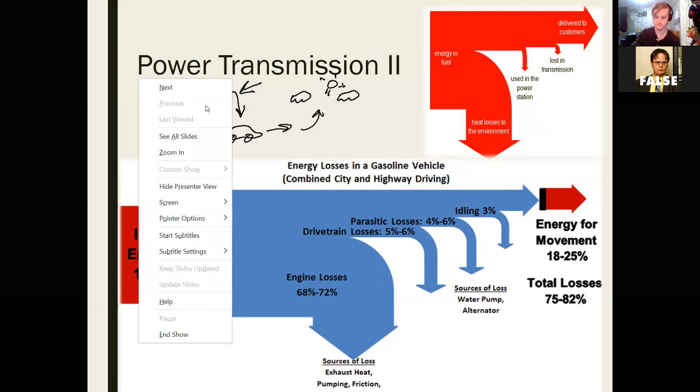And sometimes there's a bigger picture than just electric cars are cool, although Musk would like us to think so. And I'm not against electric cars. I like electric cars, but you have to make sure that where the power is coming from is actually a good place. If it's solar, if it's geothermal, if it's hydro, those are great. Wind power as well. But if they're just running a power station and then pumping it into your car, well, ripperoni.

All right, that was just an interesting thing. It doesn't have really anything to do with the class other than we're talking about power transmissions.

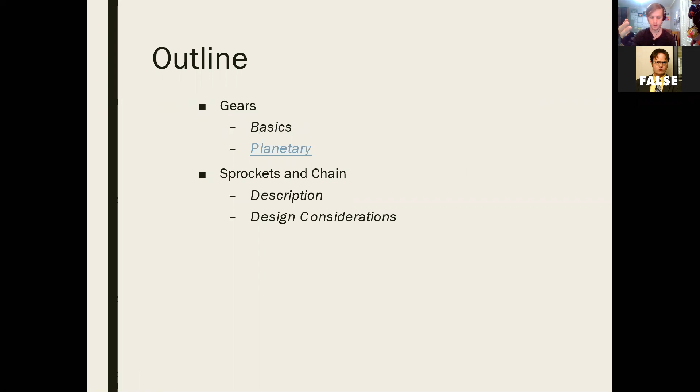So first off, this is just what we're talking about today, and we talked about it a little bit last time, is gears. You've got your basic gear types, and then you've got planetary transmissions. You guys have probably heard of planetary gearboxes. And then we're going to talk a little bit about sprockets and chains a bit more. So this is stuff we talked about last time. Do you guys remember this?

Okay. Like I said, I recycled some of these slides, so there's a bunch of these. Is that all good? I think that's good. Okay. All right. So things with gears.

You're not going to need to know this a lot, but this is some of the gear math stuff that I was talking about. So diametral pitch. It's basically how many teeth are there. Oh, I can just draw on this. That's cool. How many teeth are there per diameter, kind of, which you can see: number of teeth of the gear over pitch diameter. So it's basically how big is the gear and how densely packed are the teeth.

So do you have a bunch of little teeth, or not very many big teeth, right? So it's always an integer number. You can't have half a tooth. That doesn't make any sense. And they're always divisible by 4, at least standardly. So 32, 28, 24, 20, those all work. And diametral pitch is P, okay?

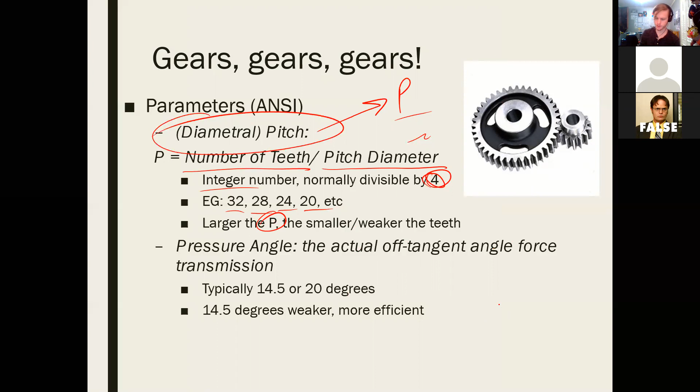Capital P. So the larger the diametral pitch, the smaller and weaker the teeth. So basically, if your diametral pitch gets bigger, you're going to have smaller, more densely packed teeth, but they're more likely to break because they're smaller and not as beefy. The reason that's important is if we were to do a free body diagram on a gear, right? Let's see, this is our gear and here's a tooth, and we can pretend there's more teeth, but all we care about is one tooth, okay?

If we were to draw the free body diagram, if there was another gear interacting with it, it would be causing a force on that gear this way, right? And we could basically do statics, which is what we did in the first section of this class, to find out if this gear tooth would break. So lots of gears will come with ratings as to what their breaking stress is. It's called their shear stress. Shear just means to the side.

And basically, if the forces that you're putting on that gear tooth are more than it can take, your gears are going to break, or they're going to grind, or they're going to shear, those all mean the same thing. But it is important that if you have something quite heavy, you check to make sure your gears are going to be able to handle it. And it's just a rule of thumb that if you know it's going to break, you need to try to make the diametral pitch smaller. So fewer teeth, bigger teeth.

Pressure angle, it kind of matters. The main reason it matters is because it's one of the things that causes two gears to mesh. If they have different pressure angles, they won't mesh. If they have the same pressure angle, they will mesh.

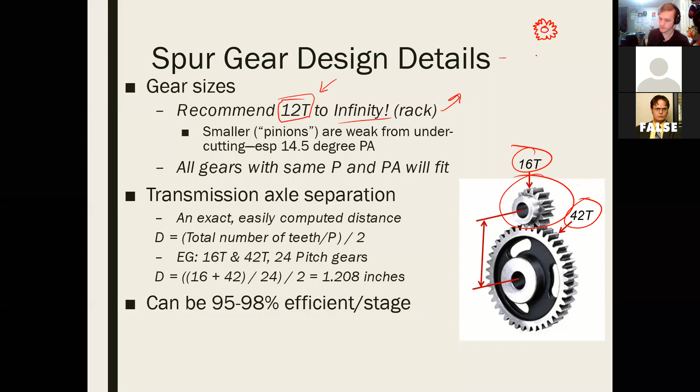Do you guys know what a pinion gear is? So rack and pinions. The pinion is the spur gear, and the rack is like a flattened out gear almost. Pinions can be smaller, and sometimes they're even smaller than 12 tooth, though it's rare. I think I've seen some in FTC. Go ahead. Is it like a gear with like a tread kind of thing? So a rack and pinion, if you imagine, this is a gear, and the rack is like this. Oh, yeah. And these two mesh with each other so that when this rotates, this moves in a linear fashion.

Okay. So sometimes the pinion, which is this little spur gear, can be smaller. They're usually pretty weak because they're tiny. And if they have the smaller pitch or pressure angle, they can break pretty easily. So you have to be careful with them. And this is important: if they have the same diametral pitch and the same pressure angle, they will fit, they'll mesh. So this is the diametral pitch. Oops, well, there we go. And pressure angle.

I don't actually know what pressure angle is. What is that? Yeah, so that was on the last slide. Okay. Basically, down here, oh, sorry, two slides back. Boink. Oh, gotta love these transitions. There we go.

So diametral pitch is just your number of teeth divided by your pitch diameter. The pitch diameter is, I don't know if you saw that, Jude. If you have a gear, you've got the under part of the tooth and the outer part of the tooth. The pitch diameter is in between them, okay? Yeah, I know. And it's typically the true diameter of a gear. Yeah. So that's how you find diametral pitch, which is P.

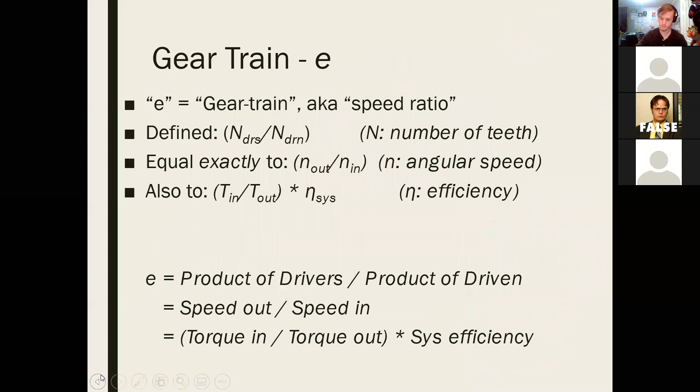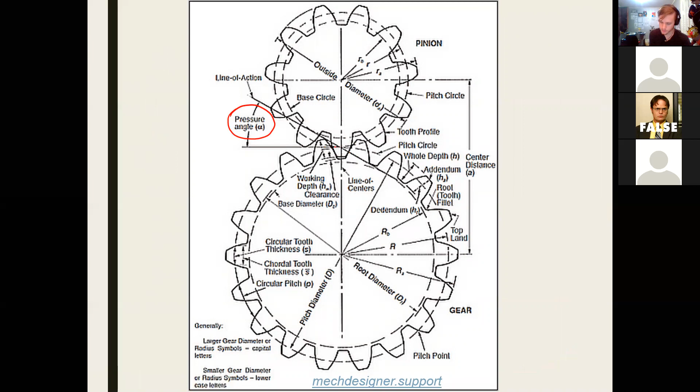Pressure angle, there's typically only two. It's either 14.5 or 20. Pressure angle is basically the angle of the tooth. And we can go back and look at pressure angle itself so you can see. Oh, there we go. So pressure angle is right here. And basically, let's see if I can get this.

There we go. Yes. There's a few different places that you can find it. I don't know if they have it on here, and it's no.

But basically what it is, if you take a point from the diametral pitch, or the pitch diameter, the pitch circle on one tooth, and then draw a line through the next tooth where it's perpendicular to that tooth, there's the pressure angle. Gears will always say their pressure angle. It's either going to be 14.5 or it's going to be 20 degrees. It's one of those two.

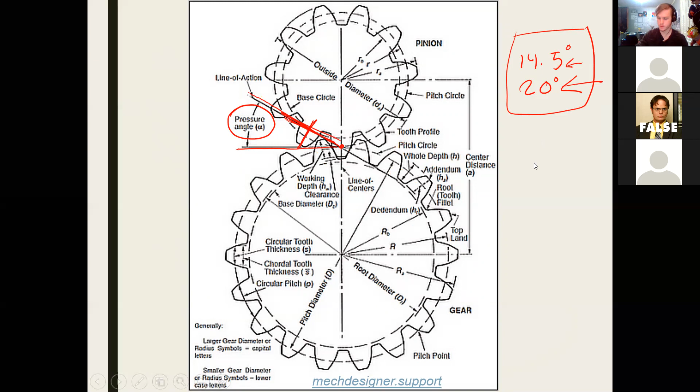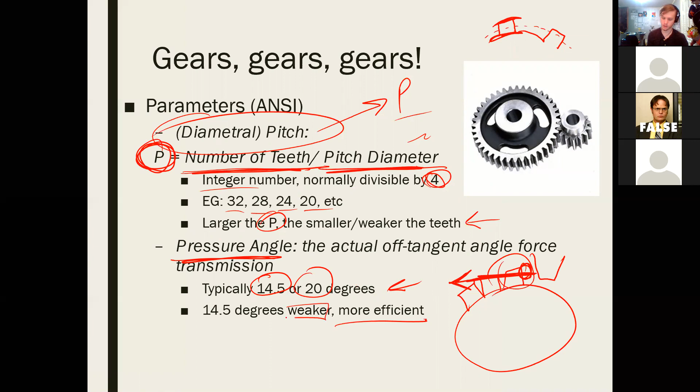I think 20 is typically more standard. 14.5 is weaker. I would imagine that most of the gears are 20. 20 is just kind of what I put whenever I design gears. So yeah, you can see down here, it's typically one of those two. This is true though, it is more efficient. So if you're doing a low load application, 14.5 can be better. But it depends on what you're doing.

Oh, this is actually important real quick, and I forgot to mention it right here. When you're looking for basically the axle separation of 2 gears, and you can see that over here, marked by D, it's pretty easy to get. D, which is the distance between those 2 axles, is going to be your total number of teeth divided by P, which is your diametral pitch, divided by 2, okay?

So if we have a 16 tooth gear and a 42 tooth gear, it's going to be 16 plus 42 divided by 24, which is the diametral pitch of these gears, divided by 2. And that can tell you exactly how far your axles need to be from each other for these gears to mesh perfectly, okay? Which in FTC, that's a little harder to do just because sometimes you're using the Actobotics rails and stuff. But if you're making your own siding, your own panels, this is a good thing to know because it's a way for you to mathematically check that your gears are going to mesh well, okay?

So keep this in mind whenever you're designing transmissions because it's a good way to double check. Kyler taught us how to do that in his class. You can also use CAD just to do it for you, but if you want to check it mathematically, that's a way to do it.

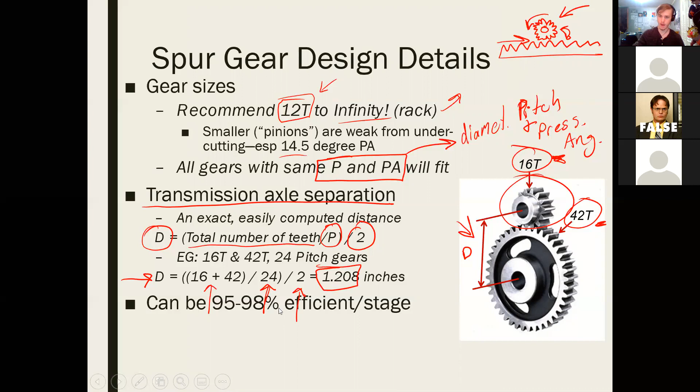Okay, worm gears. These are some different types, a little weirder gears. Good things about worm gears, and some of you probably know this, this is the big one: they're anti-backdrive. They won't backdrive. If the worm gear is the driver and the spur gear is the driven, your system won't backdrive. It'll always go one way unless you power it the other way. Okay.

So their helix angles, they're a little different than the way the spur gears work. We will say that a spur gear has 50 teeth because it has 50 teeth on it. A worm gear is defined not by teeth really, but by helixes. They're usually called leads. This one has 4 leads. Basically, if I took a circle with 4 sticks on it, and then I just twisted that circle around, you can kind of see that the number of leads is how many starting points there are on that worm gear.

So if there were only 3 to start off with, then it would be a 3 lead worm, and they'll twist around each other in a helix pattern, kind of like that. It's hard to draw. You get the idea.

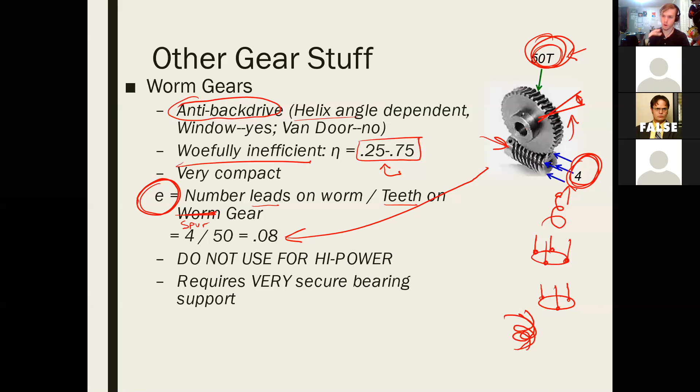For worm gears, real quick, the gear ratio, E, is the number of leads on the worm divided by the teeth on the spur gear. So for this diagram, we've got 50 teeth on our spur and 4 leads on our worm, so our gear ratio E is 4 divided by 50, which is 0.08. That's useful if you want to know your torque to speed ratio. If you need a high power application, don't use it. And make sure it's really locked in and mounted well if you're going to use it.

Hey, David. Since I'm not officially in FTC and haven't had to deal with a lot of this stuff, I have no idea what any of this means, so I'm basically just listening. So basically, this thing here at the bottom. Well, yeah, I've seen worm gears.

So technically, this typo is not a typo. Technically, the spur gear here is the worm gear, and the little thing down here is called the worm. But for simplicity's sake, I call the worm a worm gear and the thing connecting to it a spur gear. But basically, Carson, if you want something for high power applications, so high torque, high speed, worm gears are not the way to go.

If you want something relatively low power, either low torque or low speed, usually low speed, and you don't want it to backdrive, like you're winding up a winch to make something climb, and you don't want it to go back when you turn off the motor, you don't want the weight to pull it back out, then a worm gear can stop that. It's anti-backdrive, so it won't undo what you did unless you turn the motor on in the opposite direction.

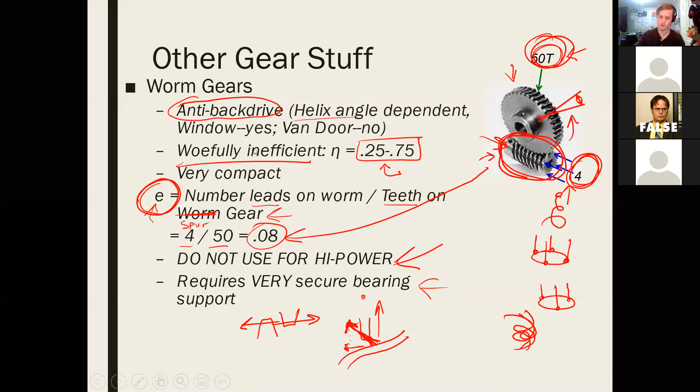of the two components of that force, the one going in the direction of actual movement is going to be much smaller than it would have been at a 90-degree angle, because some of this angular force is going up into the gear and not doing anything. Does that make sense? Yeah. So that's why worm gears are pretty inefficient; the statics just don't work well for them. This is just to show you how worms and screws in general work. Basically, you've got your lead and your pitch.

This shows different types. So you can see single start, double, and triple. You can see this one only has one lead start. This one has two lead starts. And this one, you can't really see the third, but there's one here, two there, and there's a third kind of in the back. Oh, you can see them up here. There's 1, 2, and 3.

I think most of the ones for FTC only have one lead start. I would imagine so. But when you're doing the gear ratio for it, you do need to know the number of leads. Yeah, like this is like the tooth number, right? Oh, yeah. So it's basically over number of teeth. So your gear ratio, E, is your number of leads divided by the number of teeth. And the teeth is the spur gear that it's connected to, right? So you do need to know your number of leads if you want to find your gear ratio.

The pitch is how angled out are the leads. So you can see this one has a pretty shallow pitch. This one's got a much more angled pitch, and then this pitch is pretty far over. Basically, it's the angle of the lead coming out. So this would be a shallow pitch, this would be a not so shallow pitch, and this would be a steep pitch. And that's basically just the lead going around, right?

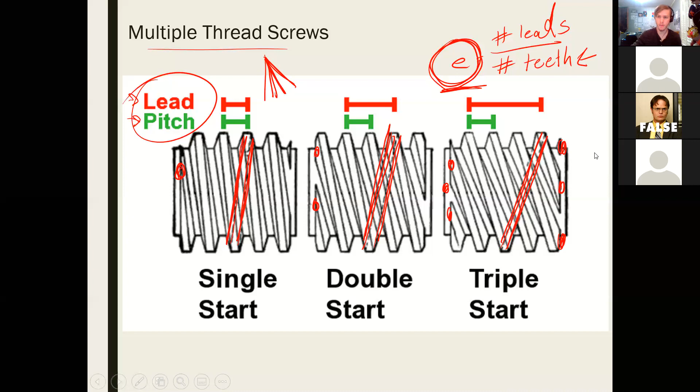This is something that I mentioned earlier, planetary gears. We're not going to go into them too much, but you guys have seen them. Your motors use them. The gearboxes on your motors. So say you have like your AndyMark 30-to-1, right? It's probably got a planetary in it.

And planetary gearboxes basically just invert one of the gears. That becomes the ring of the planetary gearbox. And then you've got your planet gears, which are these outside ones. You got your sun gear, which is this middle one. And it's basically an easy way to have an efficient system with a good reduction. So basically, they're used in motors a lot. You probably won't use them in your own applications so much.

A nice thing about them is that, let's say this outside is going this way. We got to draw some boys. Basically, they all spin in the same direction, right? So this one would roll this way, this one would roll this way, this one would roll this way, and meshing would all work out.

Not a huge deal. They're in your motors. I just wanted you to see them. There is some cool math to do with them. If you want to, you can look them up. They're more efficient just because you have 3 points of contact instead of 1, and everything's locked in a little bit more.

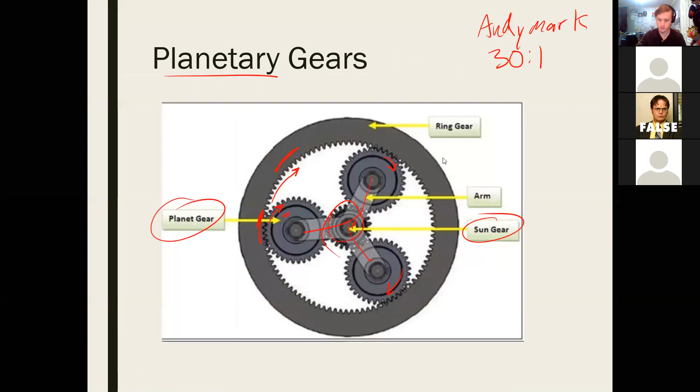Let's go. Oh, that's the wrong thing. There we go. Anyways, to do the gear ratio for them, and you guys probably won't do this, but since they're in your motors, it might be useful, is the number of teeth on the sun, which is the middle gear, divided by the number of teeth on the sun plus the number of teeth on the ring. Okay, so those middle gears don't really matter other than they connect the two.

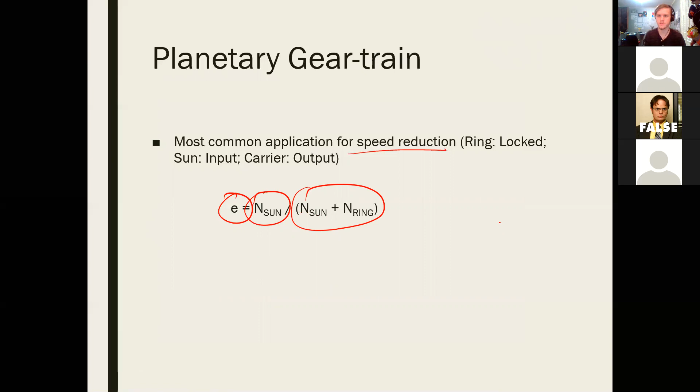Okay, and I think that's pretty self-explanatory. I don't think I need to draw that. Does that make sense? Cool. Works basically the same as the others. All right. Chains and sprockets are a little different.

So ANSI is standard stuff. It is like the standard, whatever you want to call it. It's the standardization. Chain number. Whenever you look at a chain, it's got its number. The first one is going to be its pitch in 1/8 inches. The second digit is going to be basically what kind of chain it is. So is it roller chain, lightweight, or bushed. Those just mean different things about the chain. They're not super important. Roller chain: these middle segments roll.

Lightweight means it's lighter and cheap. It could break more easily. And bushed means they're kind of like reinforced. They have bushings in them. An example, yeah, so this one, basically number 25 here. So you might see like a number 25 or a number 35 chain, right? Basically that means it's a 1/4 inch, it has no rollers, and it's bushed.

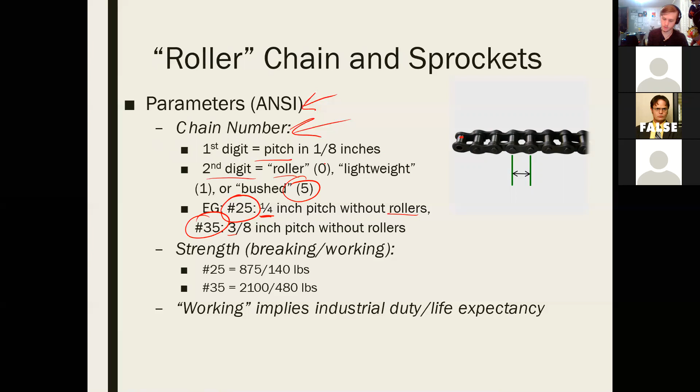Okay, so that's just kind of the way chains are labeled. I'm not a huge fan of it, but you know, I'm not the one who decides. I feel like that's pretty self-explanatory. A number 35 chain is 3/8, so it's just 3 times 1/8. You get what the pitch is, and your pitch is this guy. And it doesn't have rollers because it's got a 5, so it's bushed as well.

Important boys down here. I don't know if you'll ever need this for FTC. It is useful in FRC, which is strength, the working strength of the chain. There's working strength and there's breaking strength. Those are different, and they're importantly different. Basically, every chain number has a breaking and working strength. So if it's a number 25 chain, it'll show you that its breaking strength is 875 and its working strength is 140.

Basically what that means is 140 pounds is what you should run it at. However, technically you could run it past that, all the way up to 875, but if you do that, it's gonna break at 875. You almost never get near the breaking strength, because if you do and you hit a bump and it just tugs the chain a little bit, that impulse force will snap your chain. The higher the first number in the chain, the higher these numbers are going to be because you're dealing with a thicker chain.

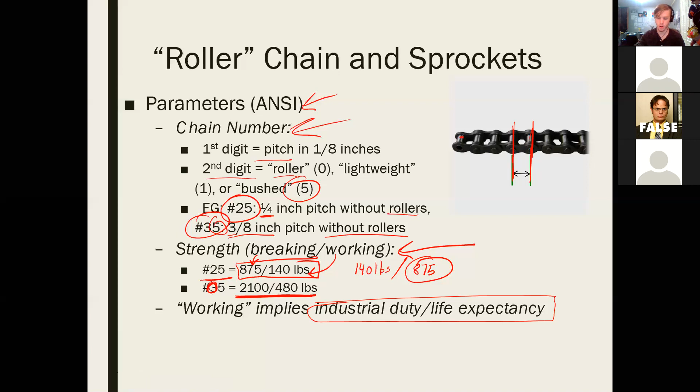There we go. I think most of you guys know this, but basically chains work in a couple ways. There's master links, which are these guys, and there's half links, which are these guys.

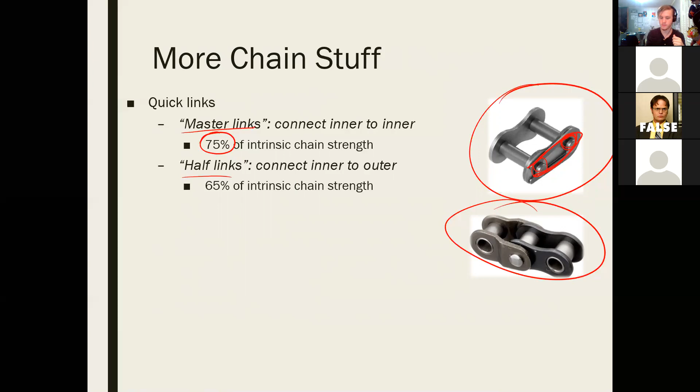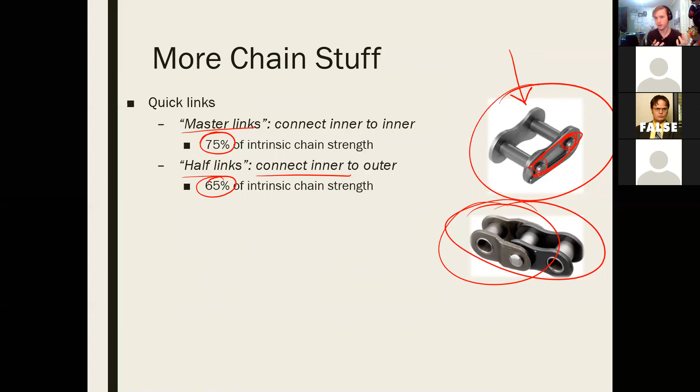So yeah. Half links, they connect inner to outer, which is over here. So if you ever need to connect an inner piece of a chain to an outer piece of a chain, you'd use a half link. There are reasons you need to do that. You won't see them mostly in FTC. You'll probably see master links in FTC if you're using chain. They're 65%. So again, you reduce it to 65% if you were using one to know that your chain's not going to break.

So quick things for chain design details. Sprocket sizes, similarly to gears, have standards. Gears are basically 12 tooth and up. However, sprockets, you're usually not recommended to go higher than 75 tooth. Why that is, if your sprocket gets bigger with more teeth, your chain in relation to the sprocket is smaller, and it's more likely going to break for your application. You're putting more force on it because it's a larger diameter.

So 75 is kind of the top that is recommended, just because that keeps your chain ratio to your sprocket size pretty good in terms of not breaking your chain. The smaller it is, the more vibration you're going to have. That's sort of sensical. You got this big diameter, it's going to wobble. And if things do vibrate, there's going to be more wear and tear on them, as you would assume. If you have larger leads, you're going to have chain loss. That's not a big problem.

And ratios should usually be kept less than 7-to-1. Reason for that is the forces in the chain, basically. It has to do with, you can see here, the chain angle. If I had a tiny little guy right here, that chain angle would be really steep, and the force on the middle of the chain would be higher and is more likely to break. Basically, just don't stress your chains. So keep it less than 7-to-1. Keep it between 12 and 75.

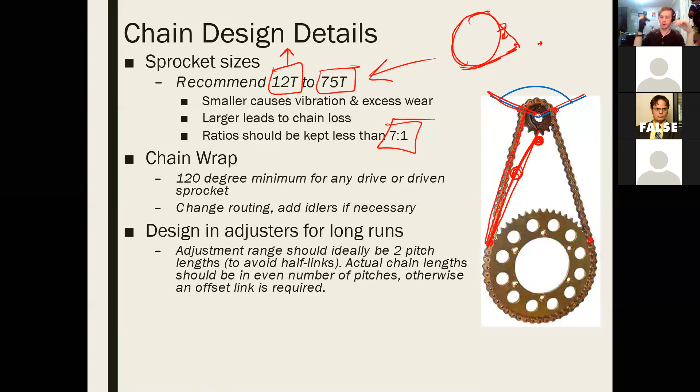Chain wrapping, basically this angle here, you can see where the chain connects with the sprockets. That is the chain wrap angle, and 120-degree minimum is standard because, kind of the same example as here, but we'll redraw. If I had this, and my chain went around here into this guy, right? The tooth might actually pull the chain inward and tug on the chain as it's going by, which you don't ever want, because you're, 1, putting vibration on the chain, 2, pulling on the chain, and 3, stressing it. All of those are bad things.

So basically, you want your angle of wrap to be 120 or larger. So you can imagine it could be, let's say 60, and the chain would only wrap to here. That would also be bad. This doesn't apply to belts, does it? Belts are similar, but not the same. The chain wrapping doesn't apply so much to belts because it doesn't catch. But you still are putting more strain on the belt. So you can do it. It's not as bad, but it's still not recommended to go too small.

And basically, the chain wrap is important because it can sometimes change your chain routing. So if we had this example up here, we have a really big guy and a really small guy, and we want to link these guys together, maybe we'll put a sprocket or a gear out here just as an idler, just to pull it so that the angles are okay, so they're not catching and they're not straining anything more than they need to. Let's see.

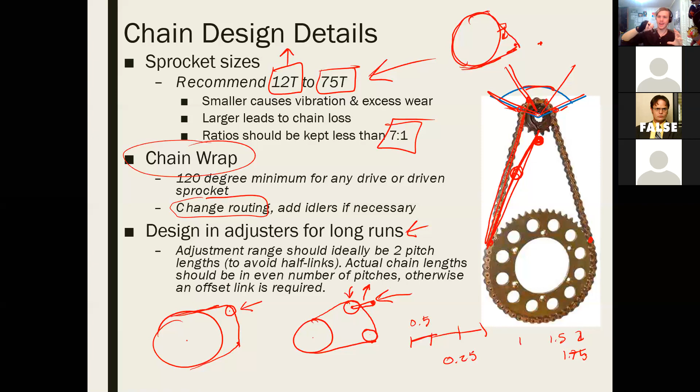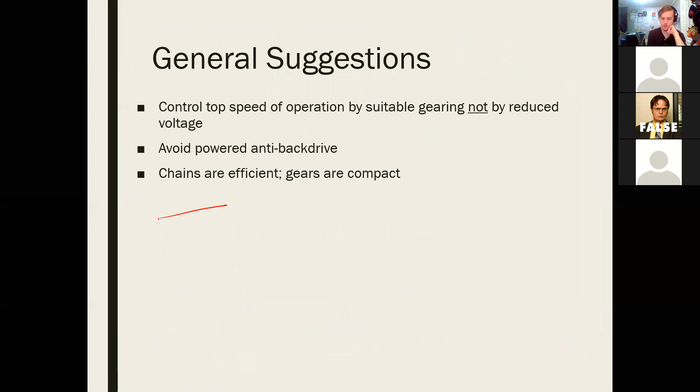So basically, big things are if you have your motor and you have an option, basically, right? You can say this motor is rated for 10 Newton meters of torque, okay? And you have, actually no, let's say it's smaller. Let's do a 5 Newton meter task. So you've got some sort of weight. I don't really care what it is, but you need to lift that weight, right? And you want to lift the weight as fast as possible, but you only need 5 Newton meters to do it.

You could either lower the voltage on the motor, right? Run it at a lower voltage so that it's not running at full speed. You know with the drill battery, how if you press it a little bit, it'll run slower? Same idea, you're just putting in less voltage. You could do that, or you could gear it. And if you gear it, put a big wonkin' gear on this and a little tiny gear, and then your output of that gear is what hooks here. You can run that faster with more power to make this guy go up super speedy than you ever could with the motor alone.

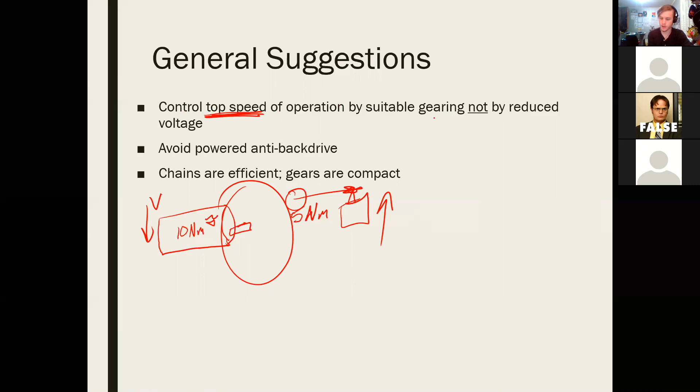And so basically the idea of that is control your top speed with gearing and not by reducing your voltage. You never want to lower the voltage on your motor when you could just gear it better. If you just gear it right, then you can get way more out of your system than by using the wrong motor. So that's a very important thing right there. Keep that in mind when you're building a system. We're going to be talking about motors later, and how to select them, so this will become more important then.

Another thing is to avoid powered anti-backdrive. So basically, if you have your robot and it's driving up a thing and it's got a hook on and it's on a winch, right? You could either put a worm gear in, which you know is not going to backdrive, or you could, let's just pretend this is a motor, you could just put a motor in and keep powering that motor.

I'm sure you guys have seen at FTC competitions robots that climb up, and when the timer ends, they just slowly go back to the ground. It's really funny to watch. What they're doing is they don't have a system that is anti-backdrive. It's powered, so they're constantly running that motor. Problem with that is the motor that's in there is going to die and release all of its magic smoke. It's gonna burn out and be sad, or it's at least gonna get hot and not last as long.

You could also use a lead screw for your climbing mechanism. Yes, and we're going to talk about some other versions of those as well. But basically, if you can do a mechanical anti-backdrive instead of a powered anti-backdrive, always do the mechanical.

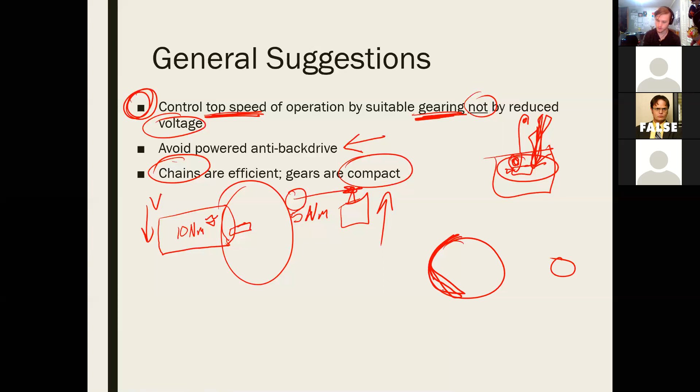Fair enough. Another thing is that chains are efficient, but gears are compact. So if you're ever trying to decide between the two, that's a good thing to know. You don't ever want a gear train that goes all the way across a thing where you could just have chains. The reason why is basically chains have all of this contact, right? So if you have a chain here, they have contact with teeth all along their wrap.

So let's say you have a wrap angle of 120 degrees. All 120 degrees of that, they are touching teeth, meaning they are all applying force on those teeth. So it's a whole bunch of little forces. A gear, one tooth hits one other tooth, sometimes two teeth. So basically you have two little forces versus like 40, meaning more of the power gets transferred through a chain than through a gear.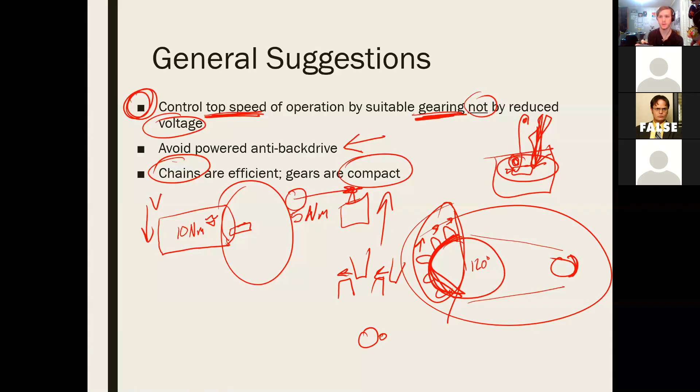However, chains take up a big amount of space, whereas gears take up a little amount of space. So if you need a smaller, compact thing, use gears. But if you want more efficiency and you don't really care about compactness, use chains. They are better in that term. Does that make sense? Mhm. So that's the end of this one.

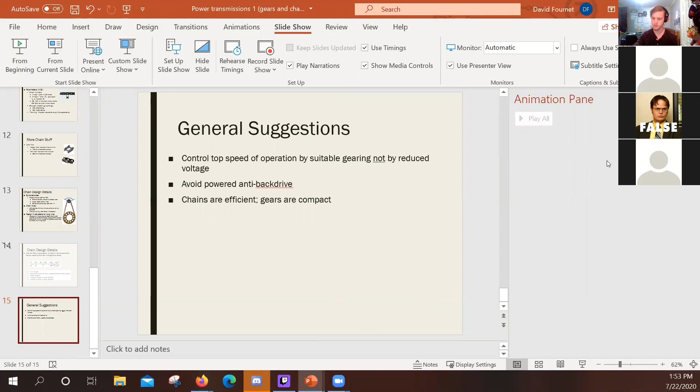Yeah, I'm going to discard those. Those are just the generals of power transmissions. There's a little tiny bit of math, but it's basically just division. I just wanted to cover those a little bit because I felt like last class I didn't have things prepared as well as I would have liked, so I wanted to go over some of them again. We're going to start motors today, but I don't think we're going to finish them because there is a lot to do on them.

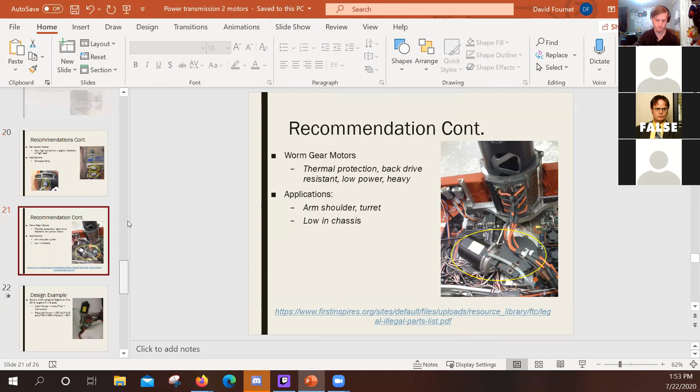So let's go. Make sure to ask questions if you have them. Also, I apologize for the transitions. Like I said, these are recycled slides. So, blah, blah, blah. Let's get these in here. There we go. All right.

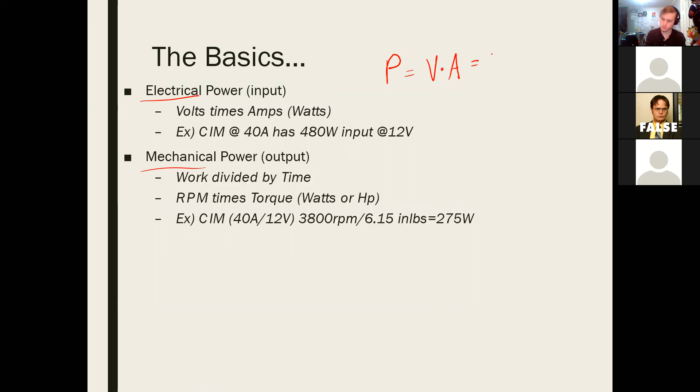Basically, basics of motors. There's electrical power and there's mechanical power. Power, which is big P, is equal to the volts times the amps, which really I should write an A or an I there for current. Or it's equal to work divided by time, or it's equal to angular speed times torque. I learned about the work over time one a couple years ago, so that one's what I'm most familiar with. Yes, work divided by time is power, and work is just force times distance.

The reason these are important is motors are electromechanical, so a lot of times you have to relate the electric version of them to the mechanical version. The more voltage, the more power. The more amperage, the more power. The more speed, the more torque, the more power. So if you're running at a certain voltage and amperage, torque and speed become inversely related. If your speed goes up, your torque goes down. Most people know that, but not exactly how it works.

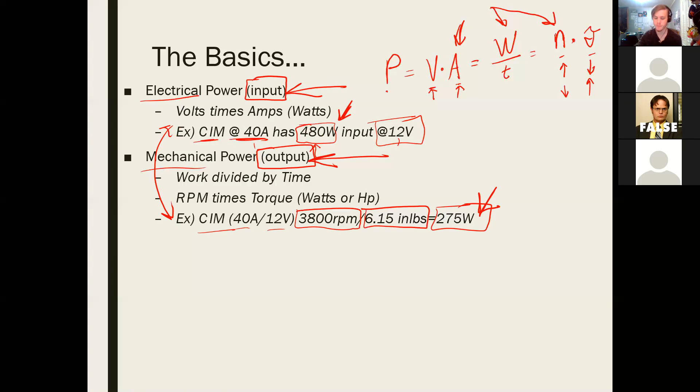Then another important thing here is what these two things relate to. When you're talking about a motor, the electrical power is its input and the mechanical power is its output. Okay, so you're always relating those two things. So basically what you can see here in this example is your input is 480 watts, but your output is only 275 watts. Reason for that is motors are not perfectly efficient, so there's energy drop off inside of them. And that's all thermal and friction and stuff.

So I don't know if I want to do these questions because I kind of like to get through things quickly. This one's pretty easy. Not easy, but simple. You guys aren't going to know the answers to these. I just want to know what you think. So when operating at their highest mechanical efficiencies, motors in general will either create minimal electrical power, create about 60% of their max power, or create maximum torque. Which one do you guys think is right?

I don't expect anyone to know the answer. B. Huh? B. Okay, so we've got Carson on B. Jude, Maxim. Sorry, what is B? Oh, what is B? No, as in Jeopardy. Oh, good. Maxim, Jude. I think it's B as well. Okay. Maxim. I'm gonna go with B. Yes. Also. All right, cool.

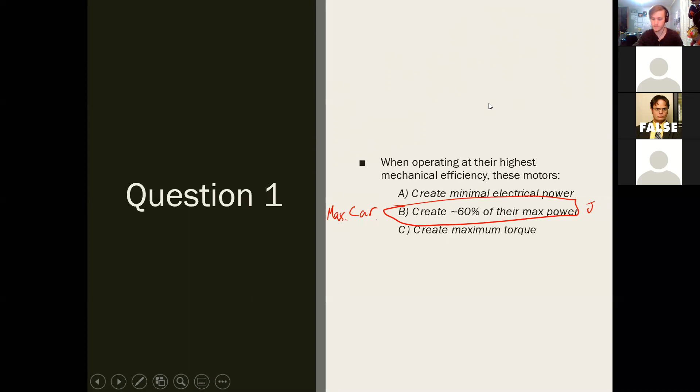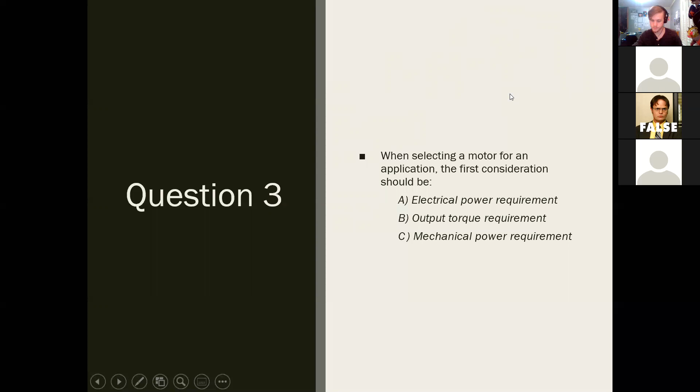So yeah, you're all correct. It is B. They create about 60% of their max power. And we're actually going to look at some cool, I know it sounds weird, but some cool graphs about that. I don't really want to do that. We're going to go over it in a bit. We're also going to go over that, so that's fine. Wait, what was the answer? B was the answer to the one that we did. You're all correct.

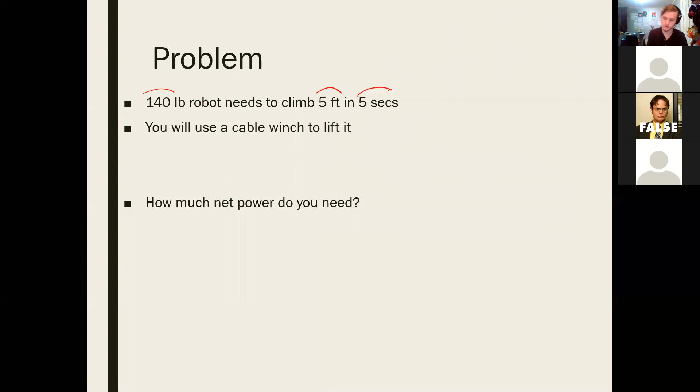So this is just a quick problem. It is a little bit of math, but it's just enough to get us started. So basically we have a problem, and this is more similar to FRC numbers, but it can be used for FRC or FTC if you just make the numbers smaller. So we have a 140-pound robot. It needs to climb 5 feet up in 5 seconds. We're going to use a cable winch to lift it. How much net power do we need? Someone get us started.

Anybody? I need to come up with like prizes for whoever gets the answers out first. Or at least whoever tries first. So I'll think of prizes for next class.

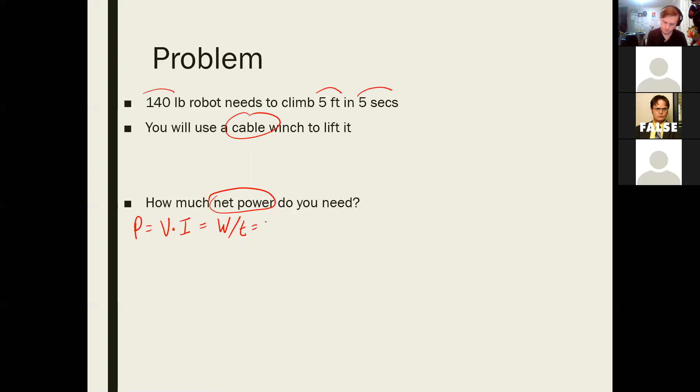Okay, so for power, I just wrote the power equations. Right. Oh yeah, another important one is work equals force times distance. Oh, okay. So would work equal 140 pounds times 5 feet? Yes, sirree. That's so smart. All right. And then what would you do? Would you then multiply it to get the work? Yeah, so basically it would be 700 pounds per foot is the work.

And then what? You have work. What do you do now? You divide it by 5 seconds. Yep. So pretty simple. You got work, which equals 700, divided by time, which equals 5 seconds. And that is, I don't know, 100. Oh, it's 140. So yeah, we're good. Because it's 5 feet in 5 seconds, it just goes back to what it was, which is perfect. Boom. We have power, and power is in watts. Usually you have to convert, but in this case we don't, so we're good. So yes, you need 140 watts of power, mechanical power, as your output to get this robot, which weighs this much, to climb this far in this amount of time. Does that all make sense?

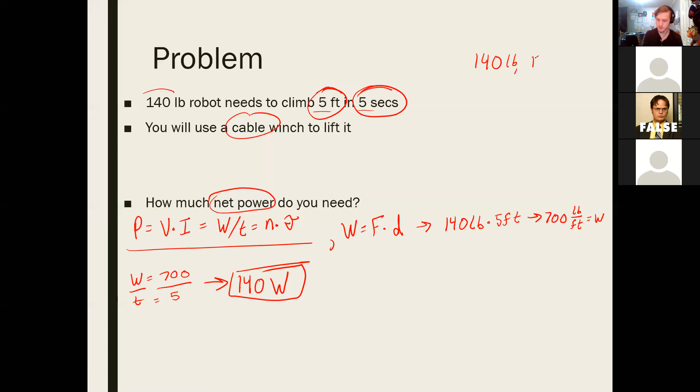Well, then why did we do the equation? Well, these numbers worked out nice. They may not. Because it was 5 feet in 5 seconds, it works out well. Okay, I thought you just ripped us off. I was like, no. Let's say it was 140 pounds, I should probably put units, in 15 feet in 5 seconds, then it would be 140 times 15 over 5 instead of 140 times 5 over 5. In this one, the 5s just cancel out and it becomes 140. This one, it would be 3 times 140, which is something or another. 420. Nice.

Anyways, so yeah, this is important though, because let's say your FTC robot weighs 20 pounds and you have a climbing challenge and it needs to raise 3 feet in 4 seconds, right? You could find out how much power you need to do that.

Okay. Should we go ahead and solve it? Yeah, sure. You guys want to? Sure. Yeah, let's go ahead and do it. So what would we do first? 20 times 3. Yep. 20 times 3 equals work, which equals 60. And work divided by time. So 60 divided by 4.

Why did I not do that in my head? 15. I don't know why I couldn't do that there.

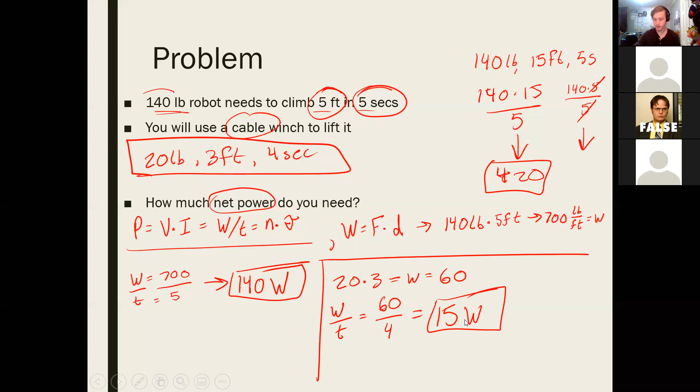So 15 watts. Boom. Much lower power consumption, but still. So yeah. So you could say you need 15 watts of power for that. The nice thing is, if you know your mechanical output, you can choose the perfect motor for whatever you're doing and know the gearing that you need.

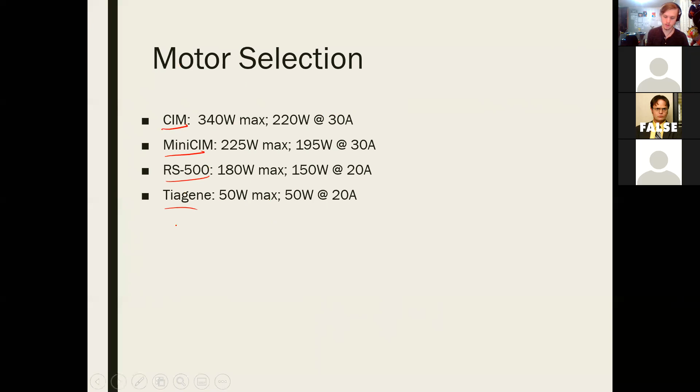So in this one, we have some example motors. You guys don't use very many of these, but you might have seen them or be familiar with them, especially if you've seen FRC. CIM, Mini CIM, RS500, and Tiagene. I think we usually call them Tagene, but basically, Tagene is a window motor. So like, the motor that makes your window in your car roll down is basically the same as this. It's called a window motor. RS500 we literally never use. Mini CIM and CIM. CIMs are these big chunky boys, and Mini CIMs are just the little versions of them.

Now we also have brushless motors. Yes, these are for motors? These are typically for FRC. FTC, you guys specifically are probably mostly going to be using AndyMark, and I'll pull up some AndyMark sheets for what we're about to look at as well, just so we can compare. But we've actually switched over to Modern Robotics mostly. Oh, really? Yeah. All right, well then we'll pull up those. The Matrix 12-volt DC motors. It's on the goBILDA website. We use those. Well, we'll pull up some sheets for those then.

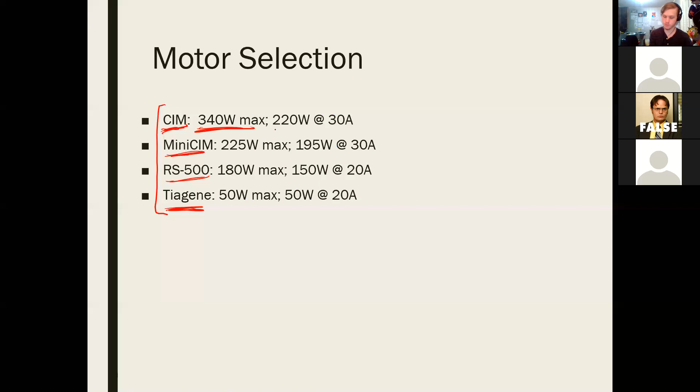Basically, these are just some quick example stats for these motors. So CIMs have a 340 watt max, and it's suggested that you run them at 220 watts at 30 amps. Okay, so this portion here is the suggested. This portion here is the max. And then we can see basically the rest of these. So if you look at them, they descend this way. The reason why is the motors get smaller and or less efficient. Like the Tiagene, I don't know how to pronounce that word, but the window motors, they have a worm gear in them, so they're less efficient by a lot. So you can see they only have a 50 watt max.

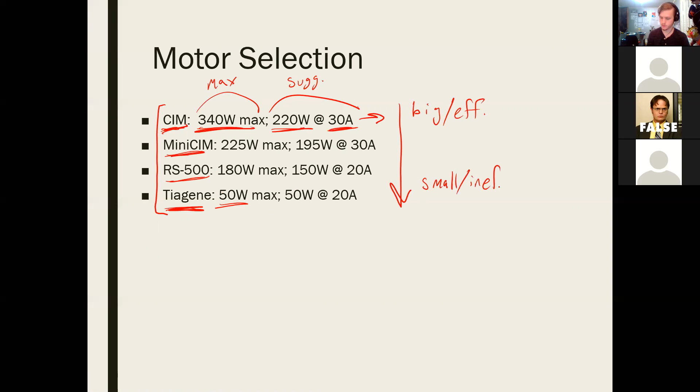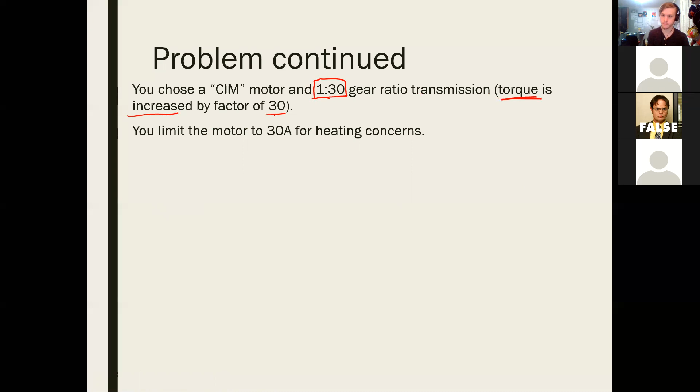But basically, these are just some example stats for motors. They go from big slash efficient to small slash inefficient. Okay. So let's say we chose a CIM motor, right? And a 1 to 30 gear ratio. Okay. That means the torque is increased by a factor of 30. We could show it in the gear ratio format, but we don't need to. And we're limiting the motor to 30 amps because we're concerned about heating up that motor and breaking it.

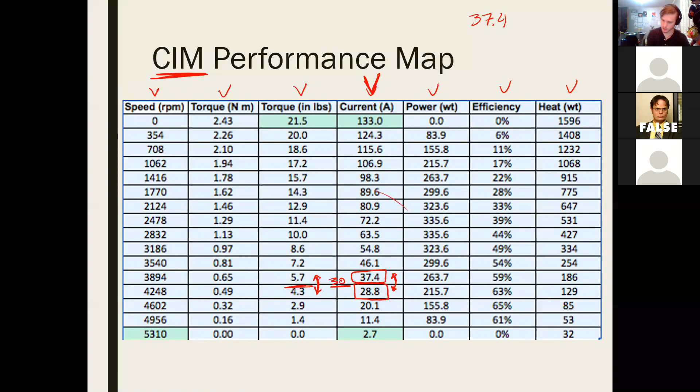Not exactly. So basically you say 37, and I actually have to remember how to do this because I always get it confused because it's basically the same thing, but they flip around. 37.4 minus 28.8 is the difference between those two, right? And then you can either do from the 28 or from the 37 to find 30, right? So we're going to do from the 28. So 30 minus 28.8 equals the difference to your target, right?

Which will be 2.2 and 1.2. Is it 1.2? Yeah, you're right. Wait, you can just do that by eye. That's an easy number. You can tell that 28.8 is closer to 30 than 37. Oh no, this is not to find whether it's closer to 30 or not. This is to find the difference between your total and the difference between your target. So we chose 28 already for finding the difference because it's closer. Does that make sense? It'll make sense once you explain more. Yeah.

So basically, and then 1.4 plus 7.4, so we got 8.8. This should be a 1. You get the idea. Okay, so now we have our total and our target change, okay? Then we have to do the same thing for the 5.7 and the 4.3. So 5.7 minus 4.3. That's 7 plus 7, basically. 1.4. Yep. So that is our change here. So basically what we're trying to say is 1.4 is going to be equivalent to 8.8. So x is going to be equivalent to 1.2.

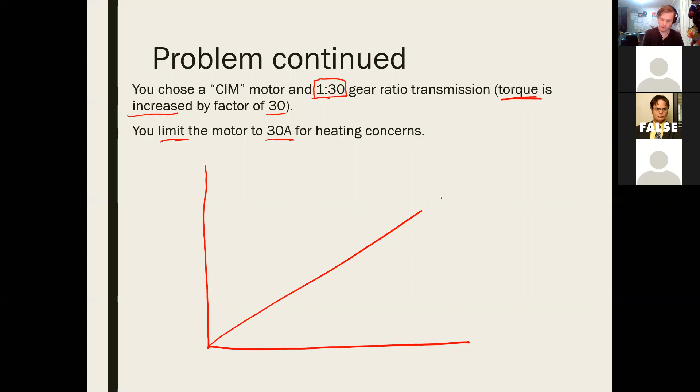Kind of. So we didn't use 5.7. We did use 5.7, but that was just to find the change down here. So 5.7 minus 4.3 equals 1.4, which was our total change. I'll show you on a graph because that'll probably clear it up a little bit. So if we have a graph here, right? And basically here's our line of words. Why can I not think of words? Torque is one of them, so we'll put torque over here, and the other one was current. There we go. Geez, thanks, brain.

So if current is marked such, and torque is marked a number, basically what we're doing is the line, the slope of this line is the ratio between the two things, okay? So if I were to go to our next thing, we'll say 4.3 and 5.7, that's what I meant. If you look, that is right here, okay? Do you see that?

It's kind of covered up now. I actually don't know how to erase with PowerPoint's eraser. Do you see the torque there? What are we looking at? Oh, 4.3. So on this table, right? Torque column right here. Do you see the 5.7 and the 4.3? Yeah. Okay. Those relate to the 37.4 and the 28.8. Okay. Right. They're just ratios and stuff.

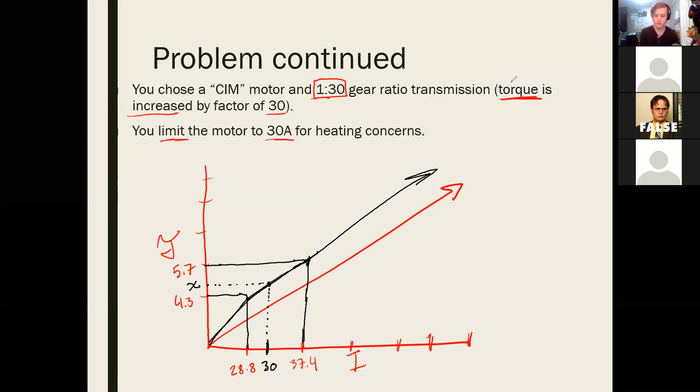Are we ignoring the problem? Like you chose a CIM motor. Yeah, don't. This had more space on it.

Okay. So just the graph here. Does this make sense? Yes. Okay, so basically the table, and then we're saying at 30, what is the X, what torque do we get out of that? And so what we're doing is we're finding the slope of the line, and then we're using it to find Y, okay? Oh, it's still in annotation mode, I see. That is what these equations are. This is super messy now. I really wish I was using the annotation the whole time, man, I need to find a better way to write on these things.

Basically, we're taking our current, which is here in the current column. Can you guys see my cursor? Can you see my mouse? Yes. Okay. So down here, you can see in the current column how there's 37.4 and there's 28.8. And in the same row, meaning related, in torque, there's 5.7 and it's kind of covered up, but there's a 4.3 under there, okay? Those are related. So we put them on this graph, and then we need to find the slope of the graph.

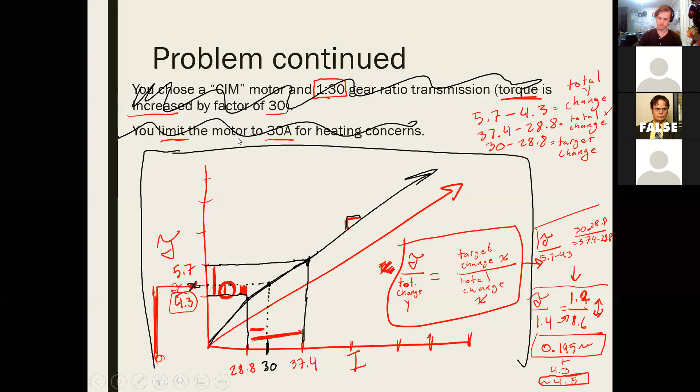All right. This is super messy. We're going to try to clear the annotations. That cleans it up a little bit. So real quick, we now have our torque. That's very cool. We also need power and stuff, but we might skip that for a sec because that's more linear interpolation.

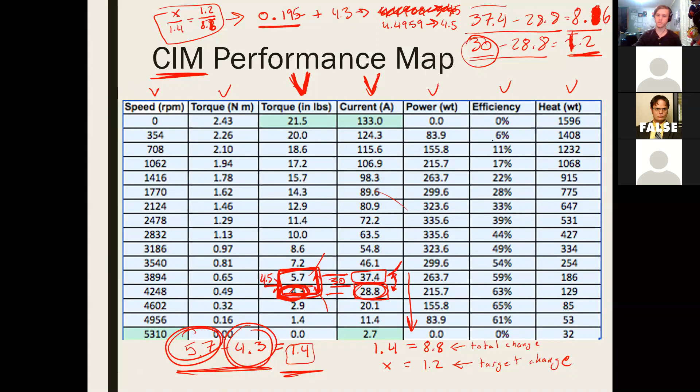Basically, what this map does is you can say, here's my limiting factor. In this case, our limiting factor was current. So how much of the other things do I get for that limiting factor, right? Technically, we could run it at lower amperage, so we could do anything under that as well, but there's not really a reason to. So in this case, we're running it at 30 amps. That means we get 4.5 inch-pounds of torque.

We could also find from this how fast it's going to be. We could find how efficient it's going to be, which in this case is about 60% efficient because we chose a 60% efficient area. We could find out how much power it outputs and how much heat it creates.

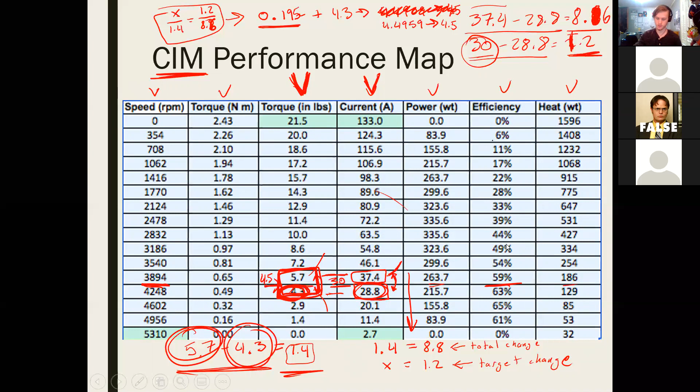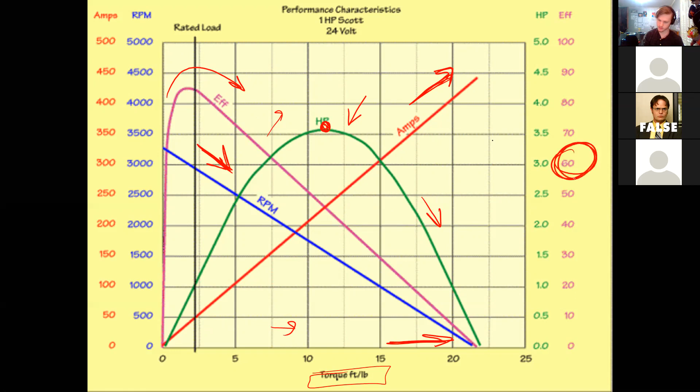Yes. Another trend, which is pretty simple: the more torque you get, the less RPM you get, the less speed. So as torque gets bigger, speed gets smaller, okay? And then the last one is efficiency, which you can see here in the efficiency curve. Efficiency goes up really quick and then starts to go down after that. And the reason that we always talk about 60% efficiency, so if you see, this is 60% efficiency. We draw a line right here.

We can make some assumptions. Basically, we'll be saying that its peak power is at 60%, but peak power is also not where you want to be running, usually because you're going to have a lower speed, etc. Depends on your applications, but peak power, usually you don't run it there. Why? It doesn't really matter.

Its peak power is usually around 60% efficient, but we always want, and we'll see this in a bit, to be operating on the left side of this graph, okay? So if I were to draw a line down the middle of this graph here, from the middle of the parabola, we always want to be on the left-hand side of this graph, okay? So always stay to the left.

Reason why is because when you're on the right side of the graph, that's when your motor is starting to die, okay? The reason your power is getting lower is because the motor itself is struggling. So you always want to be on the left-hand side, never on the right, because you don't want to burn out and kill your motor.

Meaning, in this particular case, this motor can put out somewhere between 0 to 10 foot-pounds of torque and still be okay. And you can also see RPM-wise, if we just draw a line here, it'll run somewhere between 1,500 and about 3,500 RPMs, okay? So the graph is nice just to visualize how the motor works. And most motors will have this performance map, this performance graph, wherever they're being sold, so on their website or something.

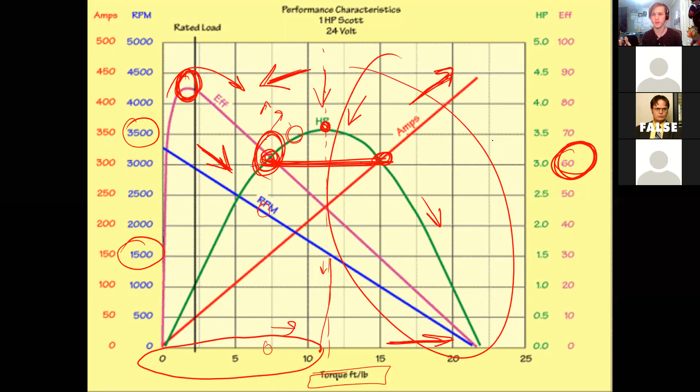Usually this line that I drew here in the middle, people will run it typically somewhere around here. And the reason why is because you get a pretty good trade-off of things. You stay high on your efficiency curve. You get good power out of it. Your RPM's pretty high and your torque is pretty high. So that's a good middle ground. You can run it lower if you want higher RPM and lower torque, or you can run it higher if you want more torque and lower RPM. Does that make sense?

Sure. I know that's a lot. We can go through other things and do reviews if we need to. We're not going to do that right this sec. Oh, wow, transitions. Hey, are we going to go over class schedule? Because yes. Okay.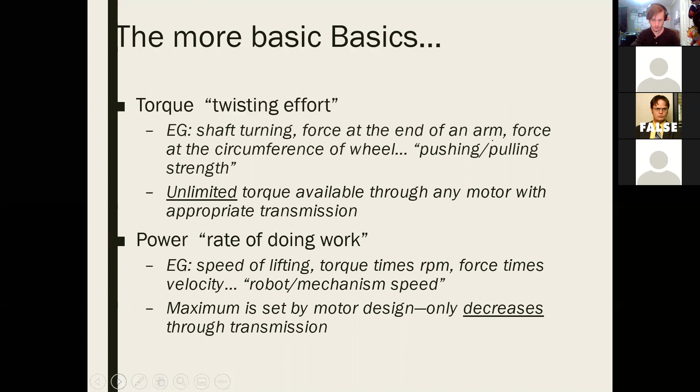Those are good, but we're not going to do them right now. Checking the time. Motor parameters. Yeah, we'll look at this real quick. Basically, this is what I was talking about. Motor parameters.

Based on the manufacturer that you buy from, they're going to show different data. AndyMark, Rev, Modern Robotics, they're all good about putting out their stuff specifically because they cater to FIRST. Rev has some inaccuracies on their site, and you can find those on Discord and stuff. You can also test it yourself, and that's actually what this is for. Like this line here, it's not that difficult to test. You really only need 4 values to predict your best performance.

You need its full speed with no load, so you get your motor speed and the current. So you run it as fast as it'll go with nothing on it. That gives you your highest RPM with no load, and your current. And then you also need your maximum torque, which is your stall. So you want to hold the motor or put something on it so that it can't move, and then push as much current into it as you want and measure how much torque it's putting out. There's a lot of ways to measure torque, but you can set up whatever system you'd like.

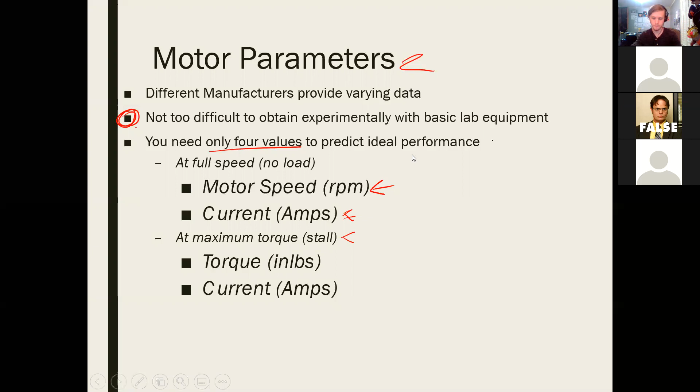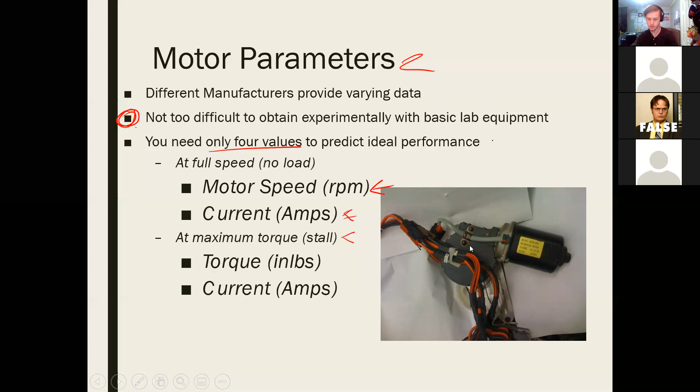So if you measure its top speed and its stall torque, its highest torque, at its highest current, then you can figure out its whole performance map from there. And you can make your own table, your own graph, all sorts of things. This just shows the setup. They seem to have a window motor hooked up to a torque setup to measure how much it will put out. This is what we were doing a little bit ago.

So what they are showing here is their stall torque, their highest current, their lowest current, and their highest RPM, their free speed RPM. So this is if you were doing it yourself. What you do is you just choose an increment. What did they choose an increment on? Current? No. Oh, it looks like RPM actually. Yeah, so they've gone by 3s every step on their RPM. There are some differences, like there's a 44 to 48 there, but basically they're going 3 RPM each time. So they've chosen an increment, and then however many data entries you want.

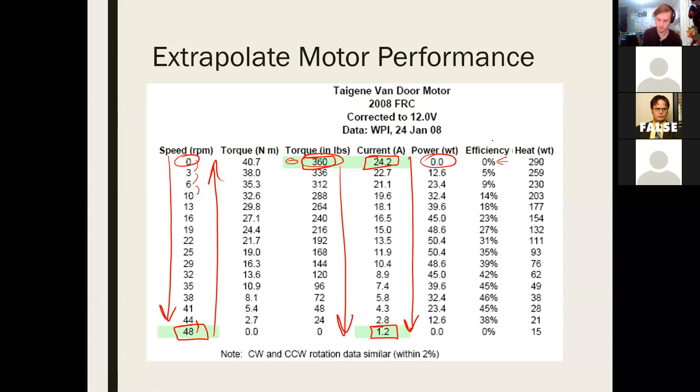Same thing for your torque, and extrapolate it down to 0. Current, you go from your highest current to your lowest current. And then everything else you can find from those things. Power is just your speed times your torque, so you multiply those together and you get your power. Efficiency, there is an equation for it; we're not going to do it. And heat, same thing. So you can definitely do this yourself for motors if you can't find stuff. This is the performance map for that motor. This is just them entering their data points and creating a graph off of it. And this is at full voltage, so you could do it at different voltages.

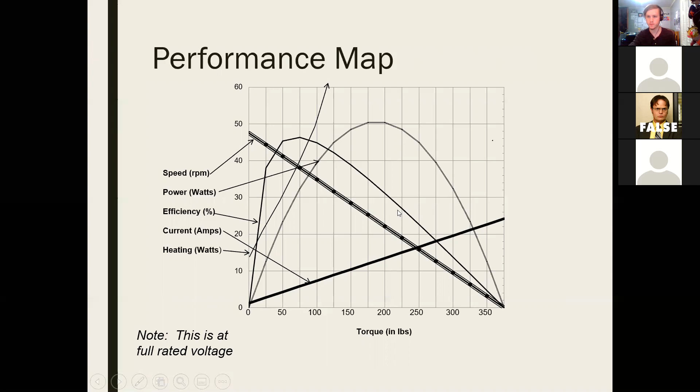These are quick things as well. Max torque will occur when there's no speed, so 0 RPM. It will produce 0 power and all thermal power when you do that because it's just stalling out. If you do lightweight motors, like this shows a blow dryer or something, they'll burn out really quickly. So don't do this to a servo. That would be really bad.

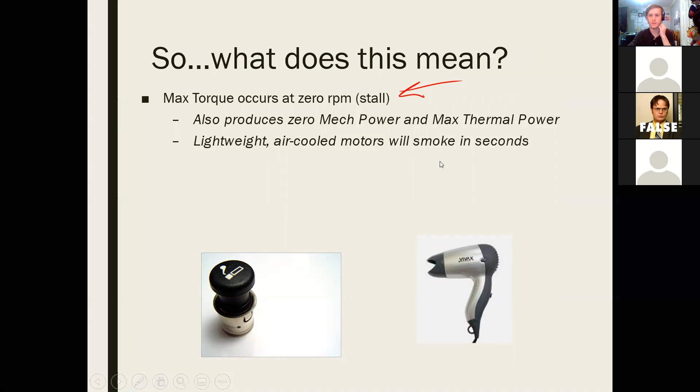Actually, I think this is where I'm going to stop for today, because past here is more like suggestions, and then we're going to get into actual math. So let's do questions, and then I'm going to talk about class schedule. Does anyone have any questions about the class, about things that we've covered today, or anything like that? Okay, Maxim, Jude? Nope. Cool. All right, let's talk about class schedule then.

So class schedule: we're always going to be doing Wednesdays from 1 to 3, as usual. However, because it is the end of summer and school's starting up and I'm going to be moving back to Massachusetts, we're going to have to figure out how this will work if we want to continue into the school year, or if people don't want that, that's totally fine.

Currently, I'm planning to have 1 or 2 more classes. It depends on when I go back up to Massachusetts, because I will not be able to teach the week that I am driving up there. So next Wednesday's class is definitely going to happen and may be the last class. If people can't make that class, or if people want to do another class, we can put one on that weekend as well. What do you guys think?